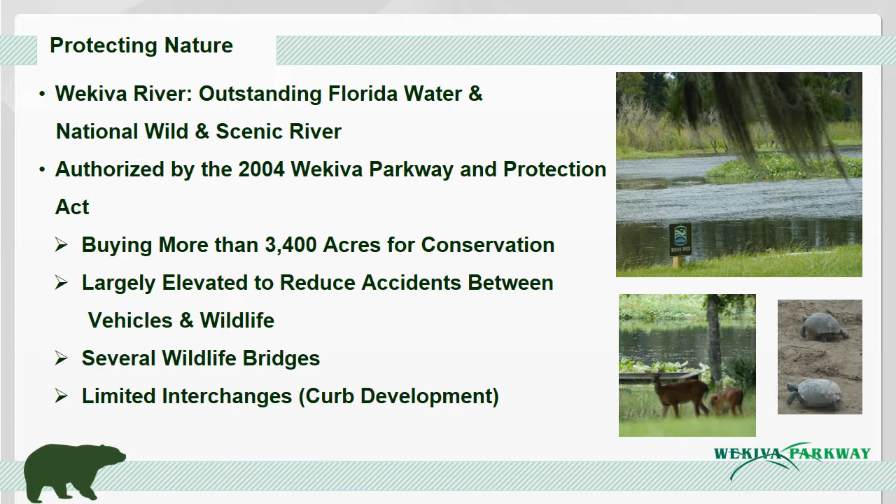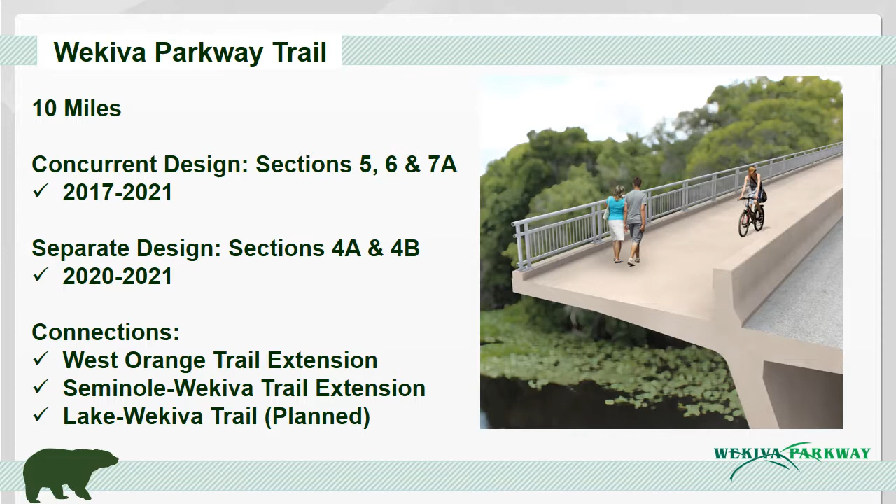The Wekiva Parkway is the first expressway in Central Florida to feature all electronic tolling. There are no toll plazas. You do not need cash on the Parkway. Both FDOT and CFX have programs to accommodate those who do not have a transponder.

All electronic tolling, or AET, enhances safety by eliminating the weaving between different lanes at toll plazas. It also maximizes convenience. Customers pay their tolls at safe highway and ramp speeds, without having to slow down or stop. You can find out more about all electronic tolling on the WekivaParkway.com website.

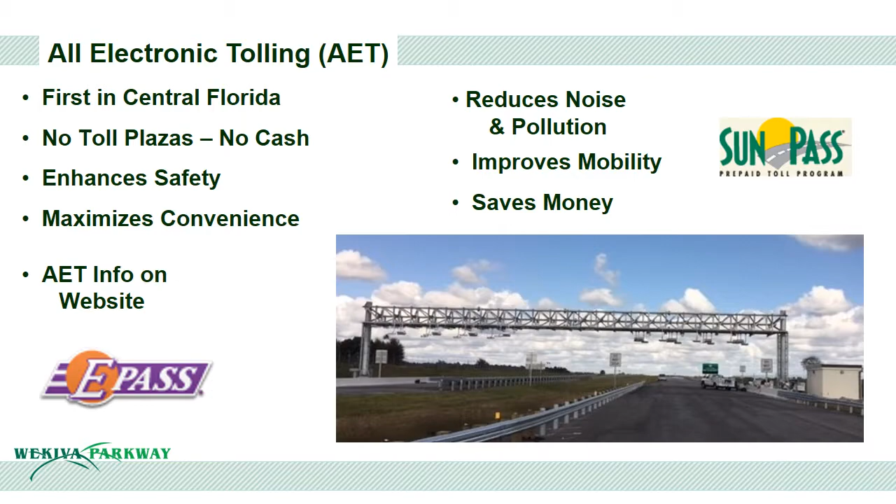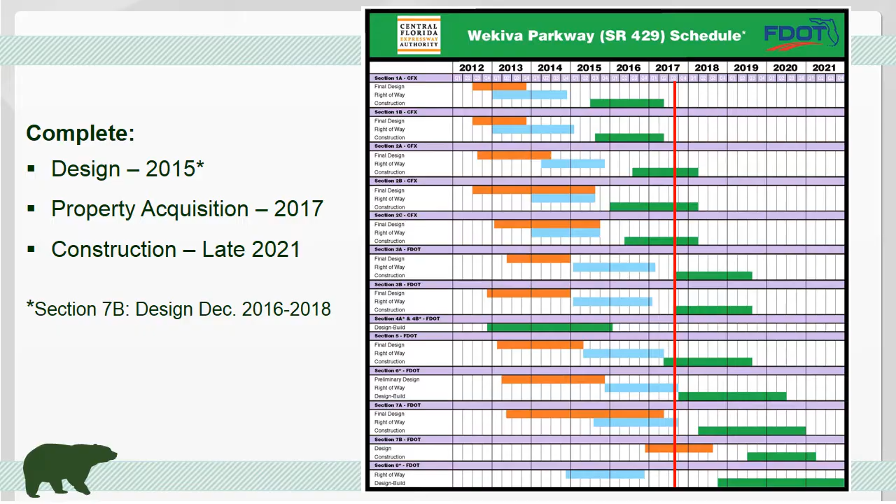CFX is on track to open the next sections in the spring of 2018. Basically, the plan is to have new sections open every year or two until all of the parkway is open to traffic by the end of 2021.

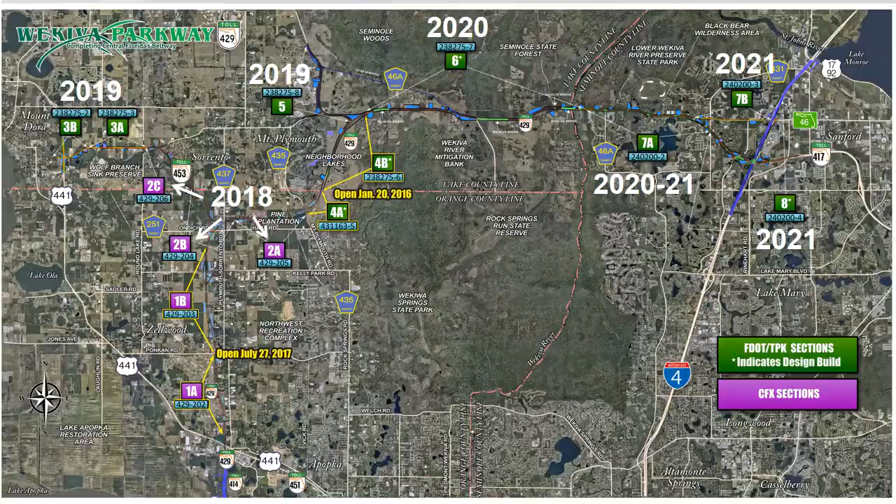So now we'll focus on the construction about to start on sections 3A and 3B in the Mount Dora area. The work will be completed in 2019.

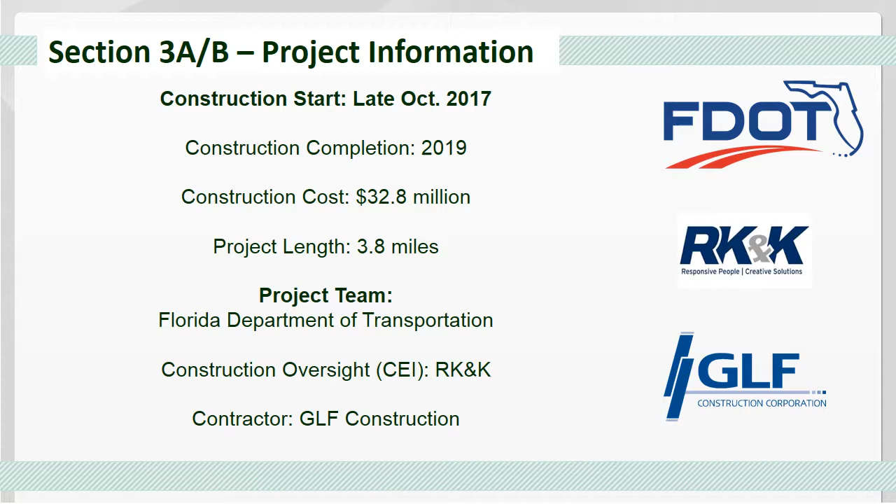Sections 3A and 3B are non-tolled improvements that include widening portions of US 441 and State Road 46 to 6 lanes. Crews will install 5-foot sidewalks and a closed drainage system, including curb and gutter.

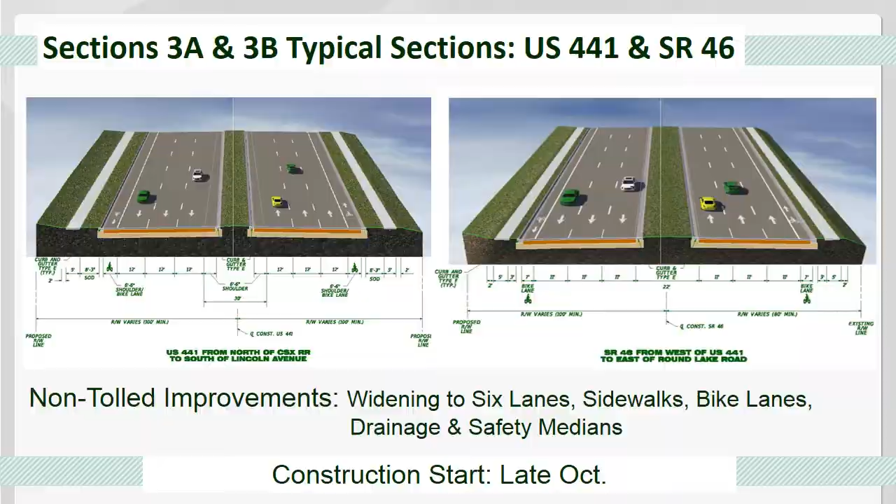We also will be widening Round Lake Road at the State Road 46 intersection and upgrading the traffic signal in this location.

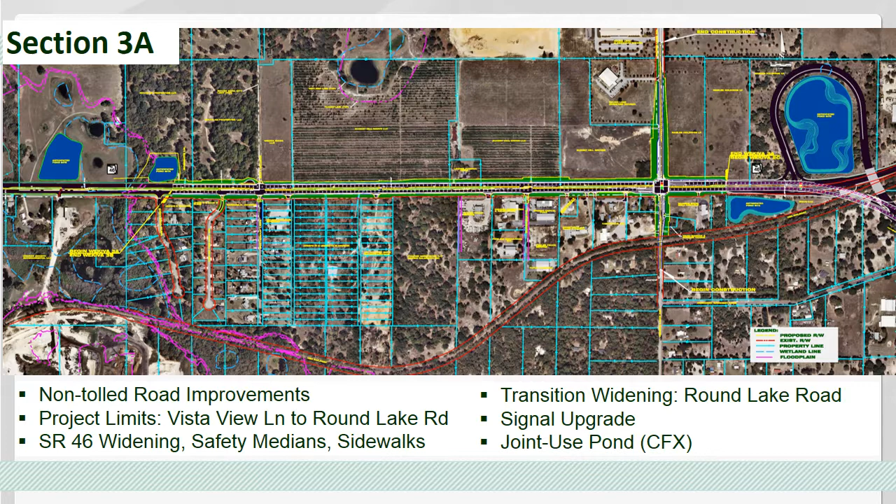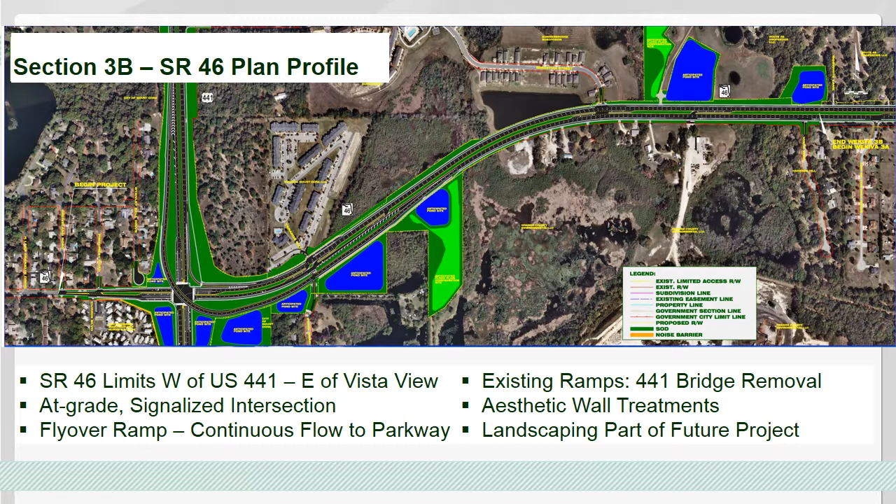This image shows the limits of Section 3B along US 441, from south of Robbie Avenue, the left side of the image, to north of Natoma Boulevard on the right side of the image.

The flyover bridge will provide free-flowing movement for people coming from the north along US 441 to head east along State Road 46 toward the Parkway.

There has been extensive community coordination on the design of this intersection. The goal of this concept is to minimize the profile of this intersection to fit the small-town feel of the city of Mount Dora.

As a result, the flyover ramp will only be about 5 feet higher than the current US 441 overpass. Also, US 441 will be below existing ground level in this location.

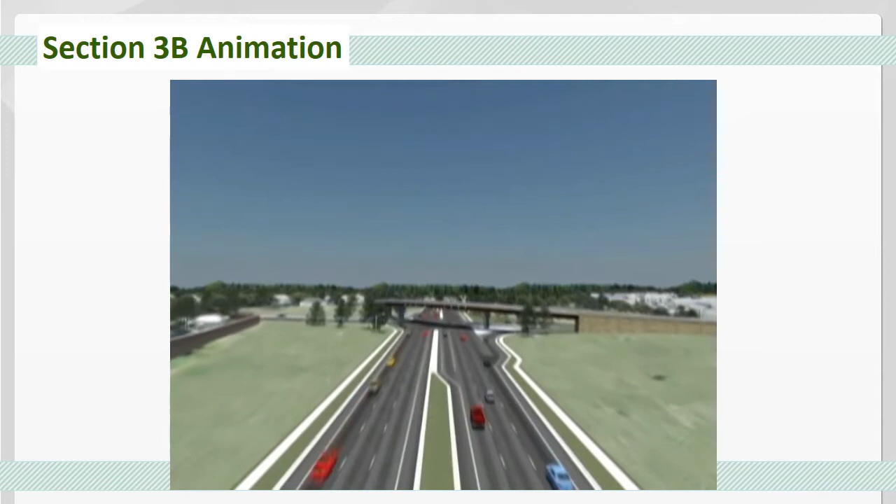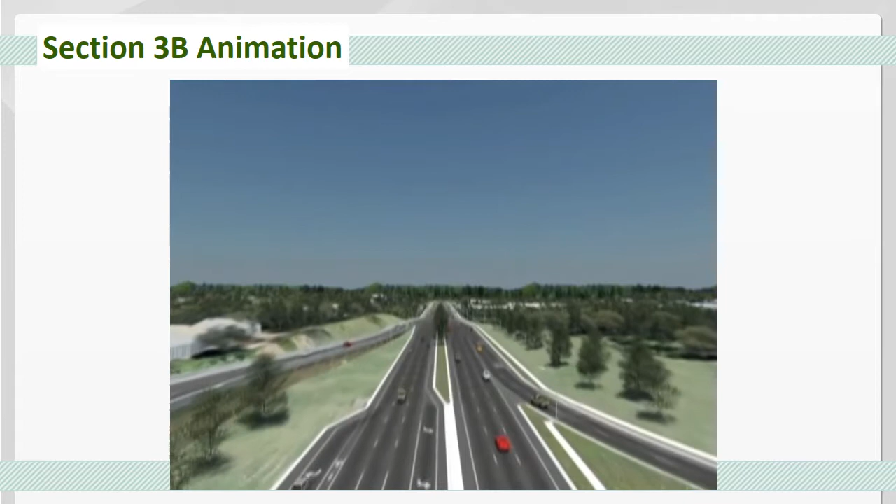Now we'll share some of the construction details of these two sections, which are being built at the same time as one project.

FDOT wants you to be aware of the construction impacts to local travelways and the surrounding area that will occur during this project. Motorists can expect lane closures, detours, as well as other construction impacts shown here.

Noise, dust, and vibration are unavoidable byproducts of construction. Night work also will be needed at times. We will do what we can to try to minimize these impacts.

Motorists should always obey the posted speed limits, safety signs, and devices in the work zone. Drivers should be mindful of construction vehicles entering and leaving the roadway.

We will provide the community with advance notification of lane and road closures, detours, and night work. The department posts important traffic news on the WekivaParkway.com website and on the Parkway Facebook and Twitter pages.

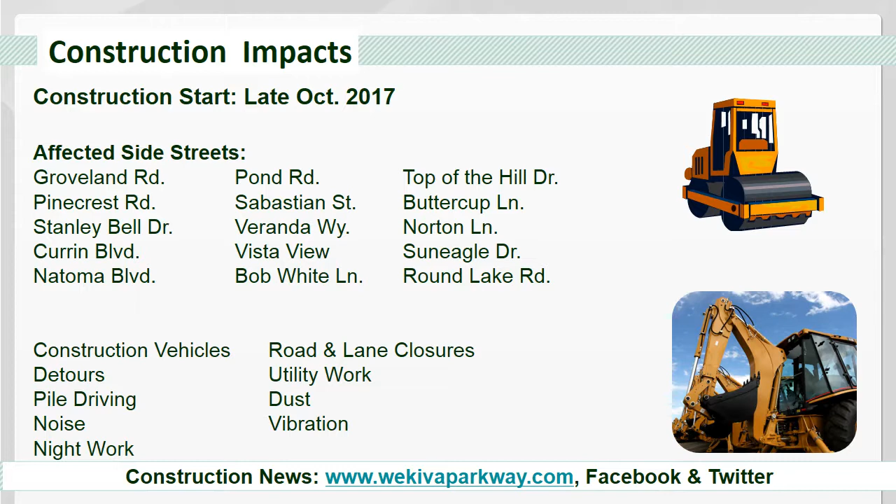During construction, community members may feel vibration from pile driving, roadway compaction, and other activities. These vibrations rarely are intense enough to cause structural damage.

As a safeguard, FDOT will monitor vibration at homes and other structures within a certain distance of these construction activities. The following areas have been identified for possible vibration monitoring.

Southernaire homes along the property's perimeter and adjacent to the sound wall, most of the Stanley Bell Drive homes along the east side of the road, the first few Summerbrooke homes at the Sabastian Street entrance, and the veranda apartment buildings closest to State Road 46.

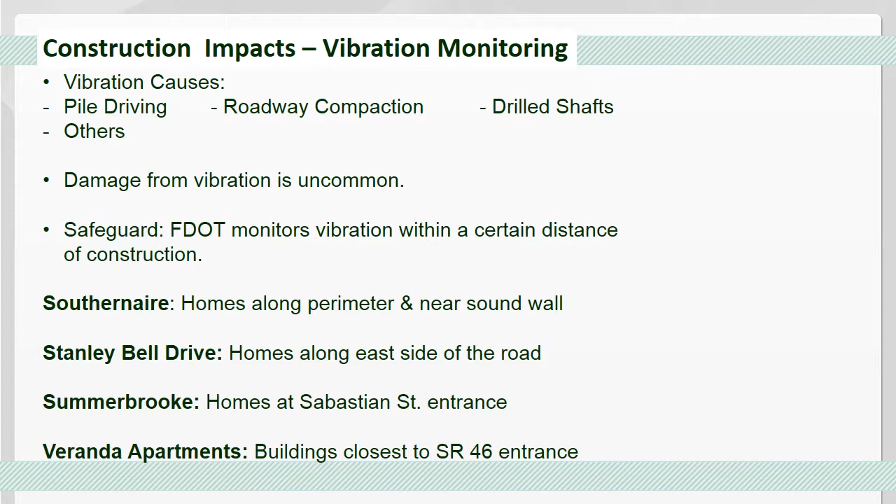Areas for possible vibration monitoring on Section 3A include homes at the Vista View Lane and State Road 46 intersection, and houses at the southeast corner of Round Lake Road and State Road 46.

There also are a couple of block walls on both sections that may need to be reviewed for possible monitoring. If you have concerns about possible impacts to your property from vibration, we recommend that you photograph or video your property conditions prior to construction to establish a baseline.

Take pictures and/or photos of drywall, stucco, concrete patios, and other surfaces. You may also want to document fragile items susceptible to cracking or breaking. Be sure to date the pictures or video.

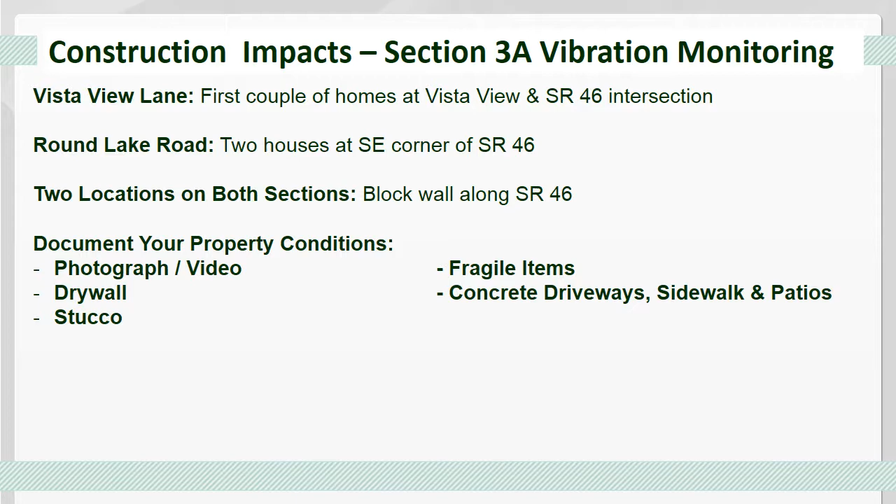Early in Phase 1, construction will close Stanley Bell Drive just north of State Road 46. A cul-de-sac will be built at the closure to allow turnarounds. Clearing along property lines will begin early in Phase 1 at the Southernaire and Summerbrooke communities.

Also in Phase 1, Top of the Hill Drive will be narrowed down to one lane to allow building the eventual change in grade or road level.

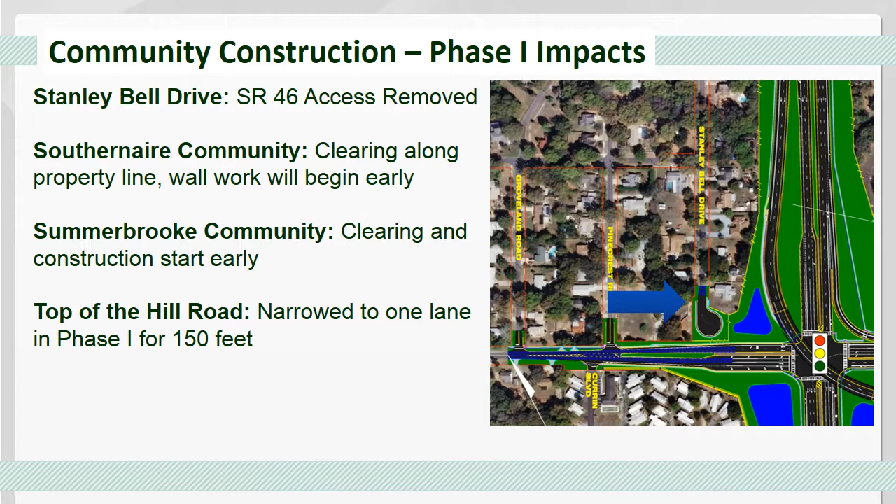Construction of the flyover ramp will mean that southbound US 441 traffic must go to the signal and turn left onto State Road 46 to access the Veranda Apartments and Pond Road. The flyover ramp will not provide access to these locations. Signs will be posted along US 441 to provide advance notice to drivers.

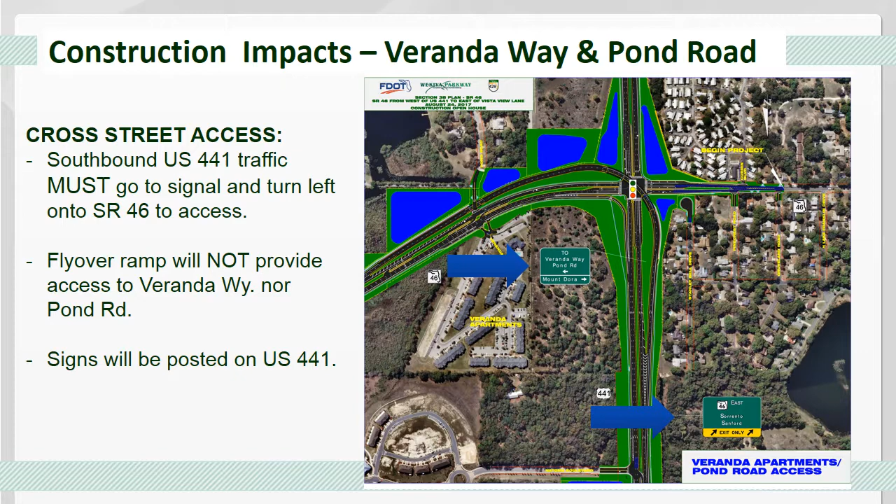Once construction begins, the contractor will clear the right-of-way of vegetation, structures, and other materials. Work along State Road 46 initially will focus on the north side of the right-of-way. Traffic will be maintained on the existing travel lanes for some time. Once the new lanes are built on the north side of the right-of-way, traffic will move onto those lanes. Work will then focus on removing the old road and building the new eastbound lanes.

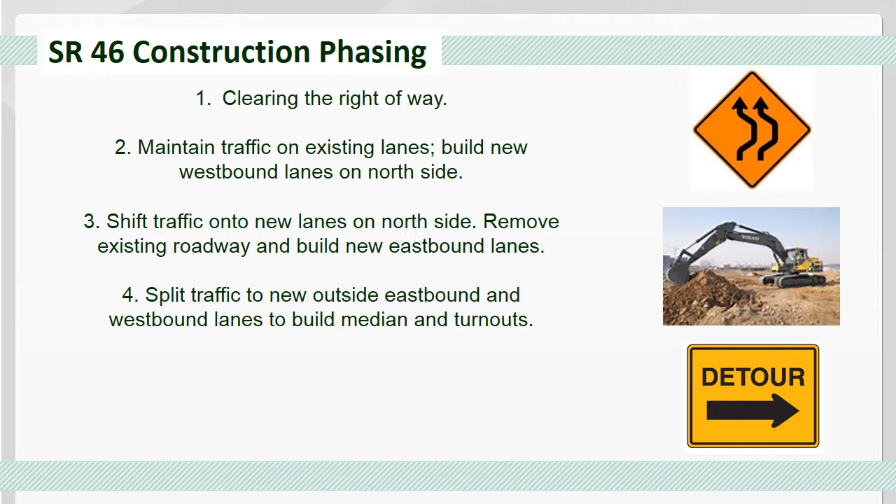Later during the process, traffic will be split and placed on the outside lanes, while the medians and interior lanes are built.

Here you see the US 441 and State Road 46 interchange, with the red hash lines indicating the work zone. Once the west side of US 441 is cleared, the contractor will begin building a detour or diversion by adding temporary pavement along the 441 southbound on and off ramps. A temporary traffic signal also will be built at the end of the ramps. All US 441 traffic will then move onto the detour or diversion.

Crews will then begin removing the bridge and building the east side or future northbound lanes. They also will begin building the flyover bridge. During various periods while the US 441 bridge is being removed, State Road 46 traffic will shift onto temporary pavement at night to allow the demolition.

Once the east side is done, traffic will switch onto those new lanes while work begins on the west side, or the new southbound lanes. Later in this process, once both the new outside northbound and southbound lanes of US 441 have been built, traffic will be split to allow building the median and turnouts in the middle.

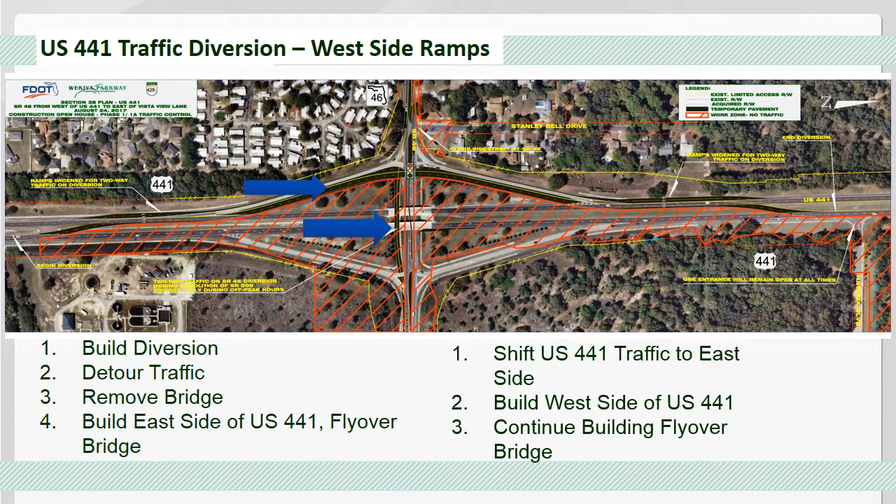Here Round Lake Road is shown left to right, and Road 46 is shown top to bottom. Traffic during construction will be managed in a similar fashion at State Road 46 and Round Lake Road, which will be widened just north and south of the intersection.

The contractor in Phase 1 will build temporary pavement along the west side of Round Lake Road. Traffic will move onto those lanes to build the east side of the roadway. In Phase 1A, traffic will be split onto pavement on the outsides of Round Lake Road, while work begins in the middle.

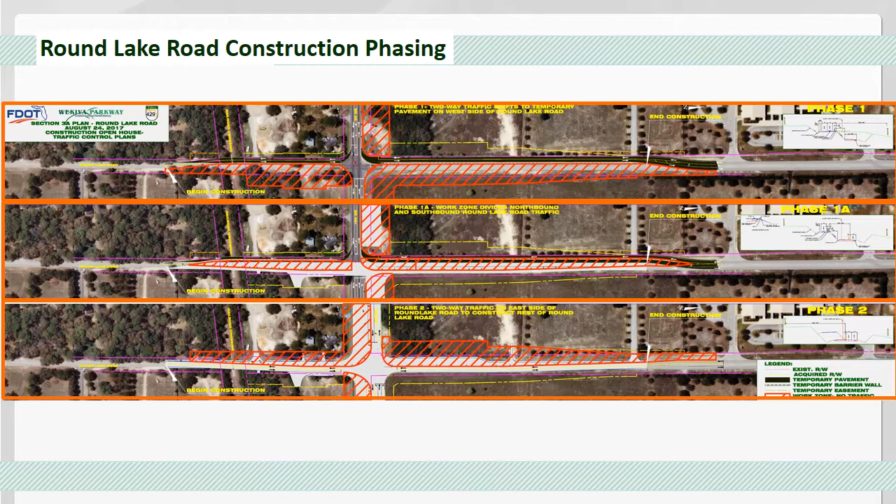In Phase 2, all traffic will be on the newly built pavement on the east side of the roadway, while work continues on the west side. In Phase 2A, traffic is split on Round Lake Road to build the intersection.

In Phase 3A, two-way traffic shifts to the east side of Round Lake Road to continue building pavement in the intersection. In Phase 3B, two-way traffic is on the west side of Round Lake Road to allow finishing construction in the intersection. There will be changes in grade or the road level during construction along Round Lake Road, which will affect the availability of left turns to some driveways.